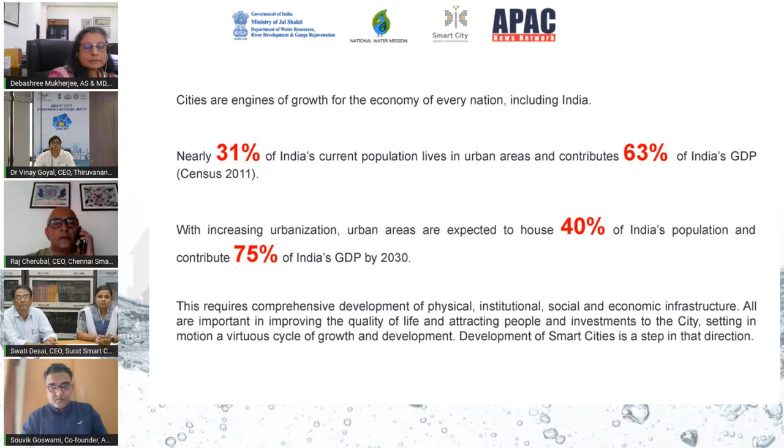Next slide. So this was the concept or the ideology behind coming up with a mission like smart city. The 2011 census shows around 31% of our population lives in urban areas and contributes 63% of GDP. But more importantly, by 2030, this figure will jump to 40% of India's population living in urban areas, and contribution to GDP will be 75%. So this shows where our focus should be, what our priority areas are in the coming years. Next. Smart cities were selected round wise. We have 100 smart cities. Trivandrum was a round 2 smart city, and second in Kerala. Kochi was the first smart city.

You all must be aware, we are the first state and the first district to be hit by the monsoon, which will be arriving very soon. So the challenges which Kerala and per se Trivandrum faces are quite different when we compare it with the northern districts, and especially the water scarce districts like Rajasthan and Gujarat.

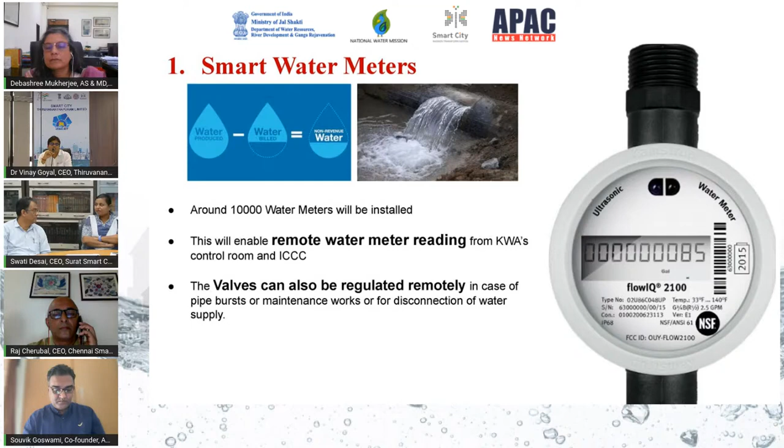And second, we have this remote controlled valve. So in case of a pipe burst, or in case of maintenance work, or if we are not getting timely bills, then these valves can be disconnected also remotely. So as of now, we have started with a pilot project, and around 10,000 smart water meters we will be installing. We are in an advanced stage where we have completed the survey in the ABD area. And as I mentioned, this entire feed will be integrated to our command and control center, where officials from the corporation and water authority department will be taking the finer details from all the inputs.

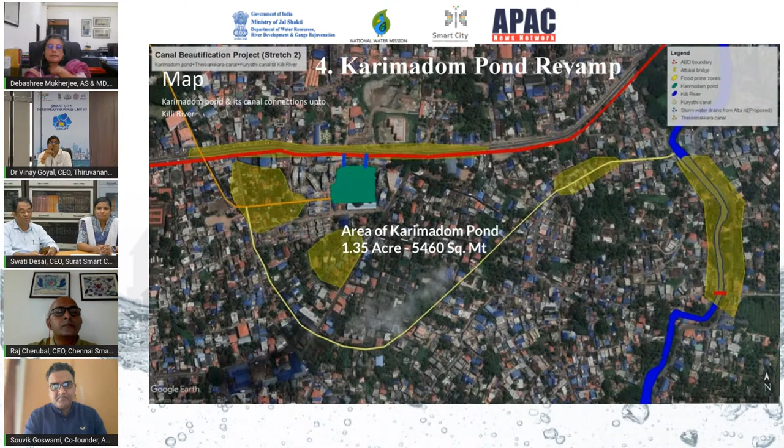Plus, the Karimadom pond was taken strategically. If you can, yes, just move to the previous slide, first slide. Yeah. So along the city drainage system of our canals and rivers, Karimadom acts as a main reservoir for all the incoming water through our dams and rivers, and then it is further connected to the sea, because we have sea on one side and hills on the other side. So proper cleaning of this pond becomes very crucial from a city flood management perspective.

Next. Yeah. So this is the fifth project which Smart City Trivandrum has taken. As I told earlier, we have a high footfall of tourists also. So we have identified 25 critical locations in the city area where we have installed these drinking water kiosks. Although the water coming from Kerala Water Authority is already pure and certified, over here we have purifiers also. Next slide.

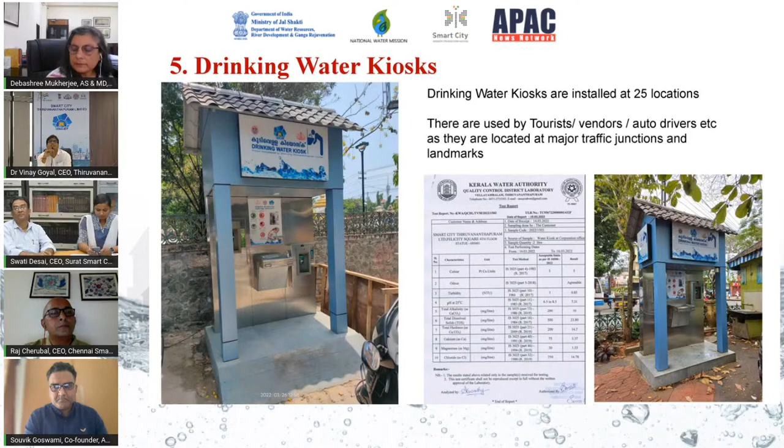Yeah, this is the sixth one, rainwater harvesting structures. So wherever possible on the sites of Smart City Trivandrum, like our multi-level car parkings coming up, a market redevelopment project, a rehab block project, then a warehousing project, wherever Smart City is making some civil structure, we are including this provision of rainwater harvesting structures into our project.

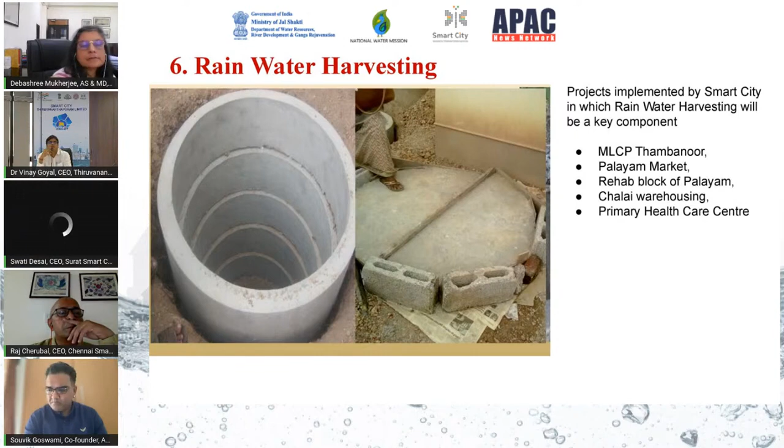Like ma'am was briefing initially, the kind of initiatives which are inculcated into our components will help us in conservation of water. So that is one aspect which we are looking into. Whatever civil structures are coming up, as far as possible, we're trying to include this rainwater harvesting component into them. Next. Yeah.

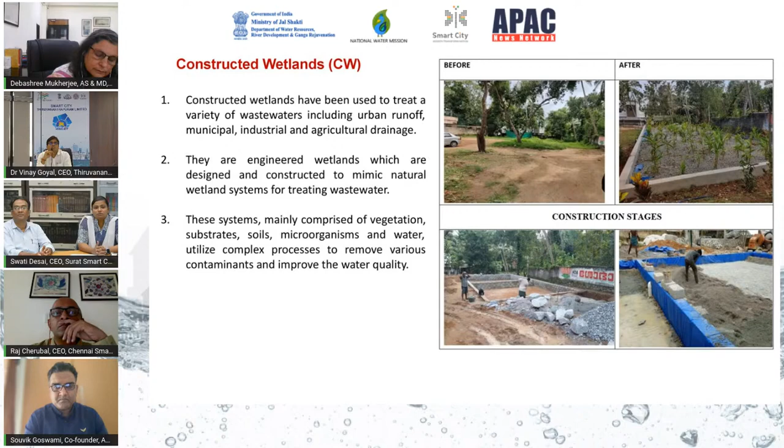So this is one very interesting project which has been done by Trivandrum Municipal Corporation. This is a constructed wetland which has been used to treat a variety of waste waters, like runoffs from grounds, from parks, from the roads, from agriculture waste. It works like a natural wetland. And the purified water can be used for gardening purposes or other purposes. So this is one project which Trivandrum Municipal Corporation is doing. Next.

Yeah, so like I was telling, we have hills on one side and the sea on the other side, and topographically the area is very small. So we have a big runoff also, and two major rivers are flowing directly through the corporation area. So cleaning of all these water bodies and especially canals becomes very important for us, especially from a flood management perspective. So this is the activity being done by Trivandrum Corporation and the Irrigation Department.

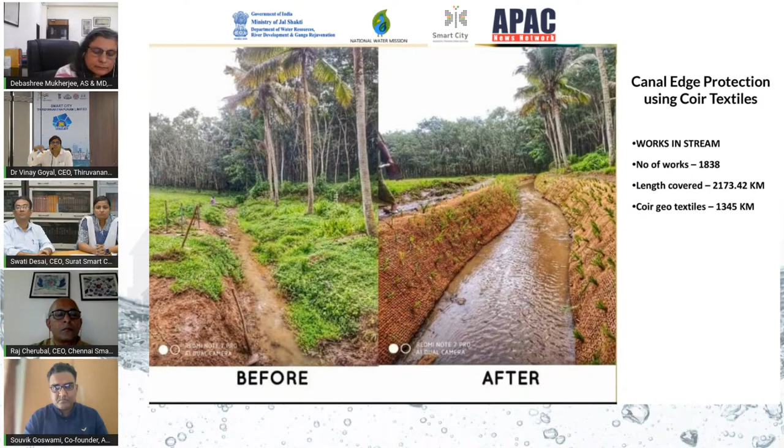So it helps the soil to get stuck and get adjusted there properly. And over the top, there is a bamboo plantation. So it goes very deeply. The roots are very deep so that they can hold the soil and the moisture also. Next slide. So these are some of the pics, photographs from that work site.

Next. Bamboo plantation, again, we know the roots of bamboo go very deep. So wherever possible in our corporation area also, if we're finding some vacant lands in and around the water bodies, we are going for these kinds of initiatives. Next. Yeah, so these are the numbers of wells recharged. 158 wells have been recharged.

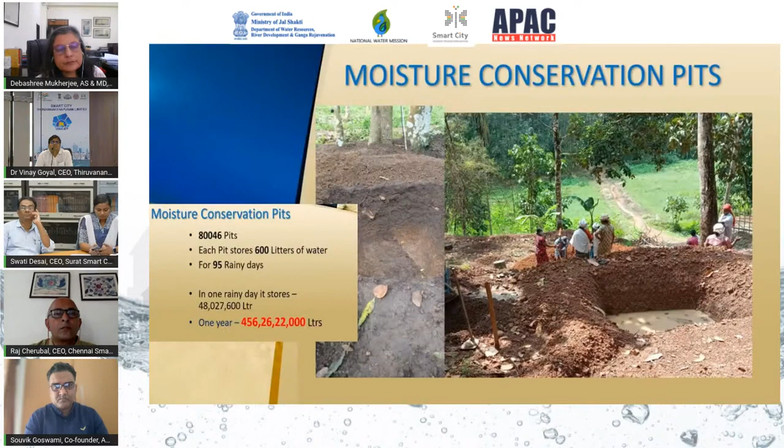Next. These are the ponds, like construction of new ponds, storage, pond renovation also. And very recently, we received a communication from the Government of India as part of the Azadi Ka Amrit Mahotsav celebration. We have been given a target of revamping 75 more ponds. So again, we are working on that front also. Next. Moisture conservation pits also we are working on.

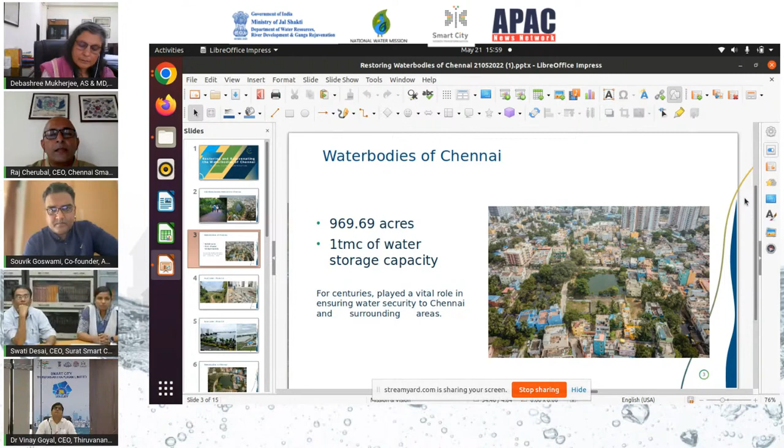Approximately, we just did a rough calculation. So 210 water bodies plus Villivakkam tank, etc., basically means almost 1,000 acres of land. So quite a bit of water has been saved above the ground, and quite a bit of water has been saved under the ground. And from what I understand, around 4 meters or so of water has gone up underground, directly or indirectly related to this water body restoration. Typically, are you able to see the Zone 14 Anai Lake?

Hello? Yes, we are. Please, yeah, go ahead. Okay, yeah, sure. I just wanted to make sure.

So most of the time, the process was about going to these taluk offices and so on and getting the FMB sketch. That was a Herculean task, because figuring out where the water body is, where the damaged and destroyed water body is, was itself a major exercise. And we thank a lot of the NGOs and government officials who helped us with all that.

Then typically what we do is either we get a consultant to do the DPR, detailed project report, or we get an NGO who has done water body restoration to figure out what water body restoration means. We create a detailed project report, and then, depending on where the fund is coming from, we get a contractor or the NGO itself implements.

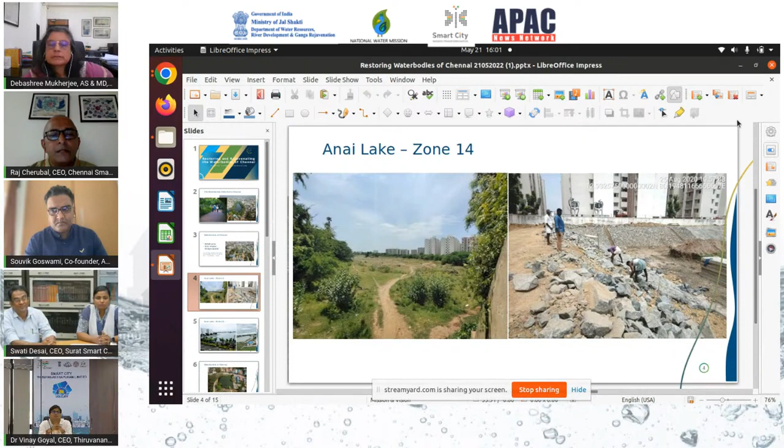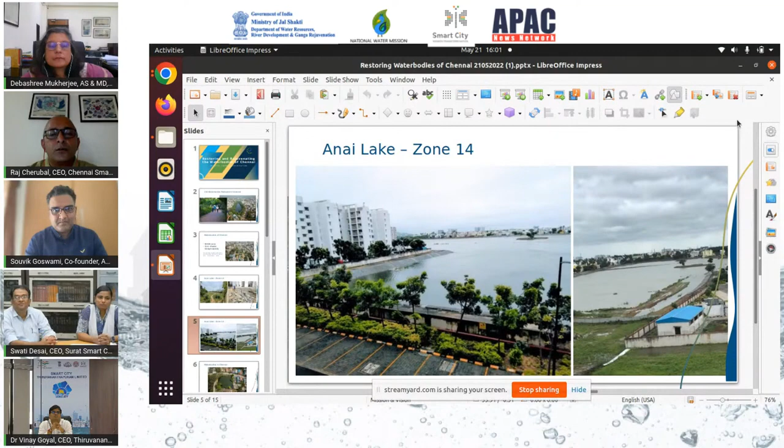So it is the same lake, same water body that I showed you earlier, which was in pretty bad shape. Today it's very, very well appreciated by the public. And you can only imagine how much water is stored in this and how much flood is prevented because of this kind of restoration. These are smaller ones, but as you can see, most of these are surrounded by all kinds of buildings and industry and so on.

So it's obvious why people had difficulty figuring out what exactly is a water body, or where the water body is. So quite a bit of this work has gone on. And just to give you some numbers, 64 water bodies were taken up under CSR funds from CREDAI, Rotary, Lions Club, and so on. About 62 were taken up under Smart City. The rest were taken up under government funding. So quite a bit of help we got from the Tamil Nadu government and various other agencies.

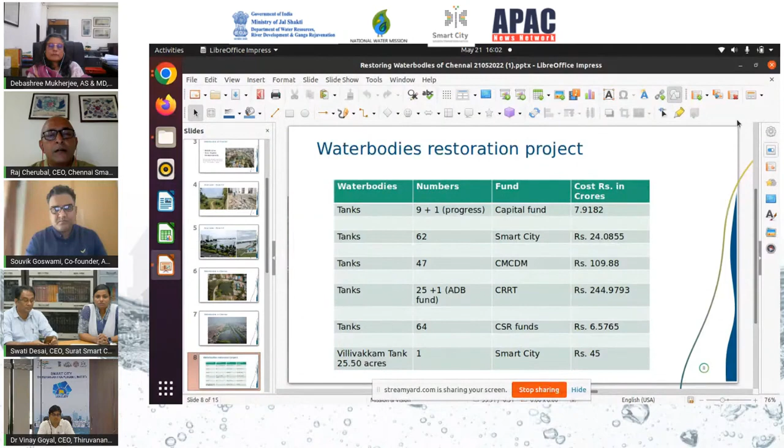And this is one of our very proud achievements. This one, if you had seen it 2 or 3 years ago, was just a sewage dump, because it was used as a sewage dump by the water department, the oxidation pond and so on. And one of the other issues was that there was no connectivity of stormwater drains to this area. So in 2015, this area actually got flooded because not only was this place full of sewage and silt, there was also no stormwater drain connectivity.

So what we have done in the last 2 years is we have completely restored this tank. Villivakkam tank is in the north of Chennai, and this will soon be kind of a little Disneyland for the public over there. So without destroying the water, they can enjoy walking and sports activities and so on.

And very importantly, the various stormwater drains have been connected to this, so that water would flow from one side to the other into the lake during the rain. And when the lake gets filled, the excess water continues to the stormwater drain and towards the sea, which is much further away. This clearly has a positive impact on the area during the rains by preventing waterlogging, flooding, and so on.

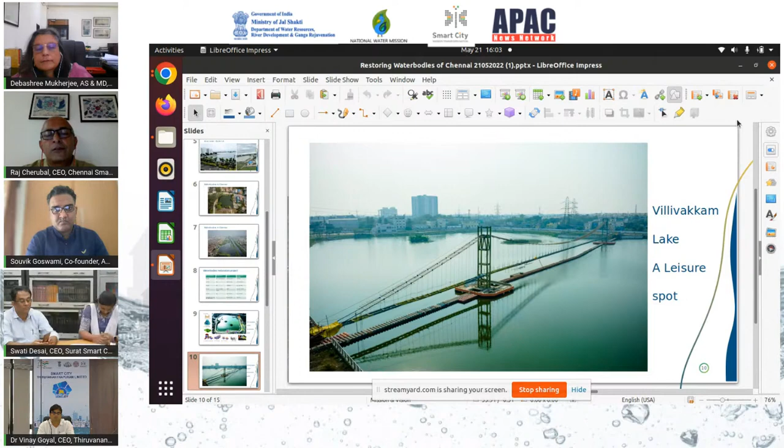We have also created a glass bottom bridge across the lake, so that the public can go there and enjoy, and more importantly keep an eye on the water body, so that future pollution and encroachment can be prevented. This is an aerial view of it. We should be inaugurating this very soon.

Then, very importantly, this is the restoration of water bodies part. Then there is the measurement part. You see, in management they say, if you can't measure, you can't manage. So what Metro Water, which is the water supply department in Chennai, said is that a lot of Chennai is supplied water through tankers, but they had very little idea of how much water is actually inside the tanker.

And as you can imagine what happens to such a system where the tanker fills in more but accounts less, and so on and so forth. So not only was it a waste of taxpayers' money, it was also a wastage of water. So what we did was we funded something like an ATM card. Every driver of the tanker has an ATM card which has a built-in number, let's say 6,000 liters. So he or she has to put the ATM card into this machine, and only that much water is released.

So this way, the Metro Water is able to keep track of how many tankers and how much water each tanker is carrying and where it's going and so on. So much better control of the water supply.

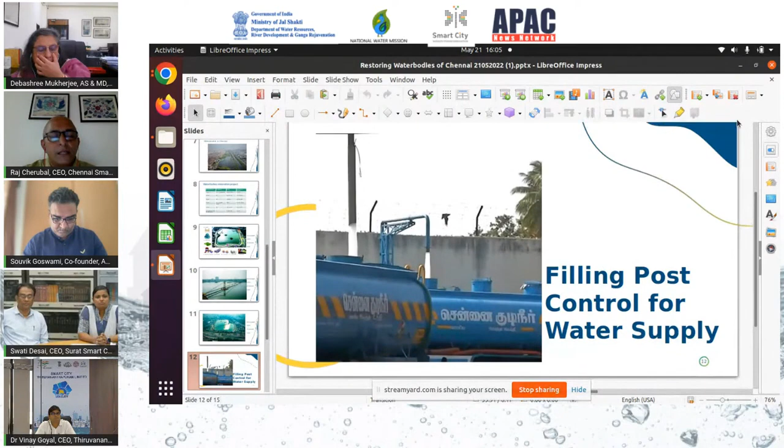Similarly, very importantly, there are two kinds of metering that we have done. One is bulk metering, for commercial and big establishments. There was very little idea of how much a big building is consuming. So if the meter is not working, they would just put an average, even though the water consumption may be much higher. So this is one thing Smart City has funded, and I'm sure it's saved a lot of money and water for the public.

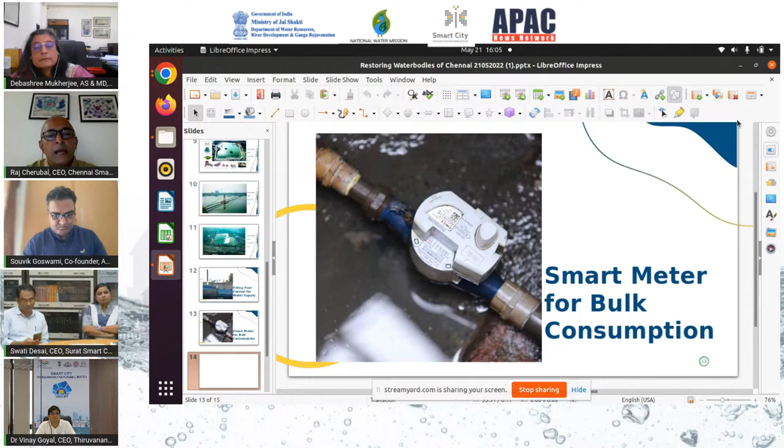And also there is another kind of metering, which is like the zone - entry point into the city, exit, from a DMA kind of setup. I think 200 odd meters we have provided. This also helps them understand the flow of water between the various parts of the city.

So what we realized from some studies earlier on was that for example, T Nagar, which is the ABD area, it's not a question of not having water. It's a question of the west side having plenty of water while the east doesn't have any, within a matter of 2-3 kilometers. The issue wasn't lack of water. The issue is management of water.

So these kinds of smart metering mean you don't need a man or a woman to go check the meter every now and then. It communicates with the central server periodically, telling you how much water flow went through it and so on. So these kinds of mechanisms not only help you measure how much water went in and out, and if there is pilferage and so on, but they also save manpower cost - you don't need people going and checking all the time.

Plus, you can switch the meter on and off remotely. Also, for example, if the meter is not working, you obviously get a message in the server, and you get notified that the meter is not functioning, so you can take action. Compared to a traditional meter which doesn't communicate with the server - if it doesn't work, it doesn't work, and you don't get to collect the fees.

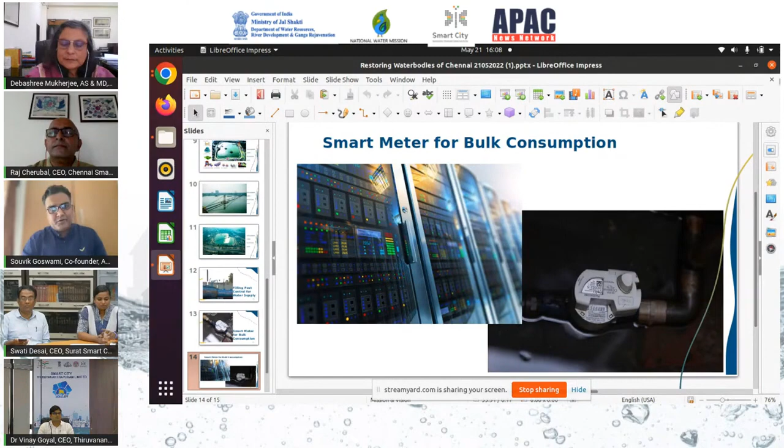I think the last suggestion given by you is very important, where you talked about analyzing data for change in consumer behavior pattern, so that we can conserve more urban water. Thank you so much for your insights.

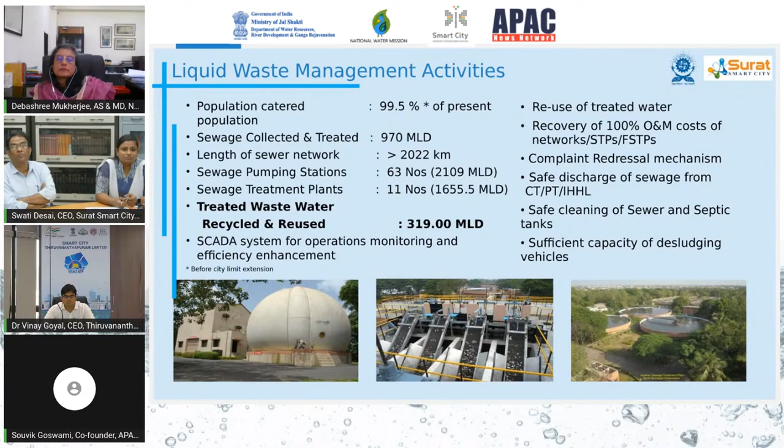We have a digital complaint redressal system for the water and wastewater management system. These are the indicator reports from the last years, showing 100% coverage of these parameters. Coverage of wastewater network service is about 100%. Collection efficiency of the wastewater network has also crossed near 100%. Adequacy of wastewater treatment capacity stands at 134%. These are the parameters we have already achieved in an excellent way.

Next is the concept of recycling and reuse of sewage water through tertiary treatment. Tertiary treatment is one of the success models among our Surat Municipal Corporation and Smart City Mission projects. Surat already has 115 MLD of treatment plants existing in the city for tertiary level treatment. The project concept was initially executed to tertiary-treat secondary sewage to generate industrial grade water, to supply it to Sachin and Pandesara.

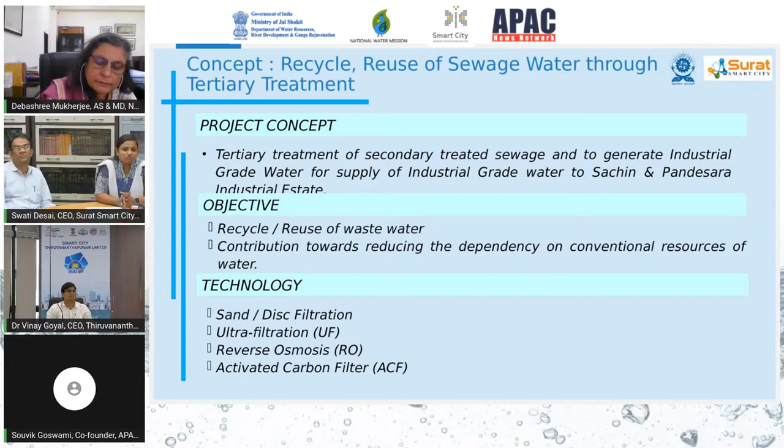The vision is to adopt the tertiary treatment project and promote the reuse of treated wastewater for gardening, industrial reuse, tanker filling, lake restoration, flushing, construction, and agriculture purposes. The vision is also to maximize the collection and treatment of generated sewage and reuse of treated wastewater on a sustainable basis, thereby reducing dependency on fresh water. We are saving our drinkable water to provide to public residential pockets.

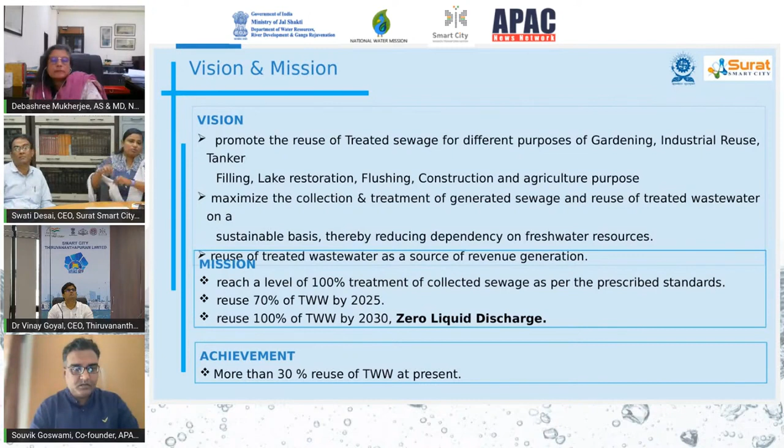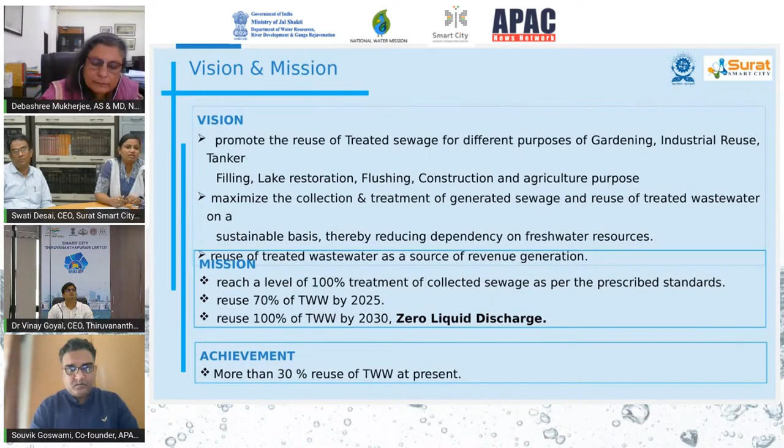The mission also includes revenue generation. We aim to reach 100% treatment of sewerage collection as per prescribed standards, and reuse 70% of treated wastewater by 2025, and 100% of treated wastewater by 2030 - achieving zero liquid discharge by this timeline. Right now, we already have 30% of secondary treated sewerage reused as tertiary treated water.

We are planning to give secondary treated water for construction purposes, as well as for the metro rail project here in Surat. All construction sites are given secondary treated water. We have a biodiversity park covering 87 hectares of land, where we want to provide secondary treated water for watering trench lines in the zones, rejuvenation of lakes, and heavy water bonds. These are the parameters we are providing so far.

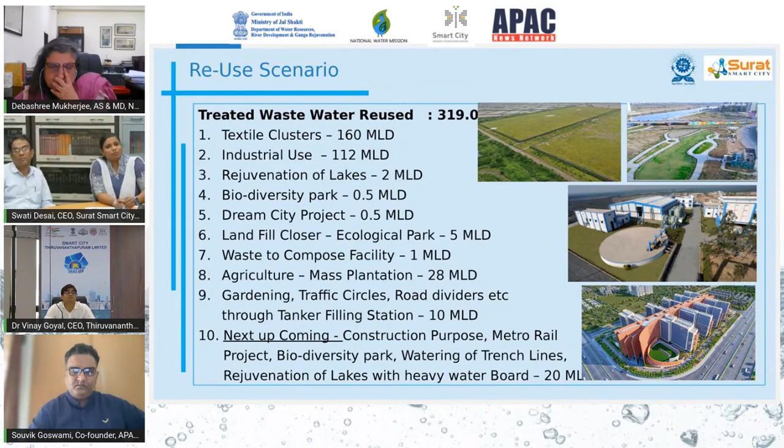This is a success story Surat has already achieved. Surat, being a textile city, has more than 450 dyeing and printing houses. Pandesara Industrial Area is a major textile cluster with more than 125 dyeing and printing houses - they are the bulk water users right now. Pandesara Industrial Estate was merged with municipal limits in 1986, and SMC started supplying potable water for industrial purposes since 1998, to meet the increased water demand of industries and reduce the burden on water resources primarily required for domestic purposes.

SMC initiated the idea to opt for using treated wastewater to satisfy industrial demand. With the support of user industries and the state government, SMC built a 40 MLD tertiary reliable wastewater treatment plant, which is a successful model operational since 2014.

After the success of the first larger operational tertiary treatment plant for the Pandesara industrial pocket, additional demand was raised for TTP water as process water for industries, and hence an additional 40 MLD TTP was undertaken by the Smart City Mission at Dindoli. Looking to assure quality and quantity of TTP water, industrial setups adjoining the city also came forward to get their wastewater for their own industrial purposes, so we also got a 35 MLD treated TTP plant at Bamroli.

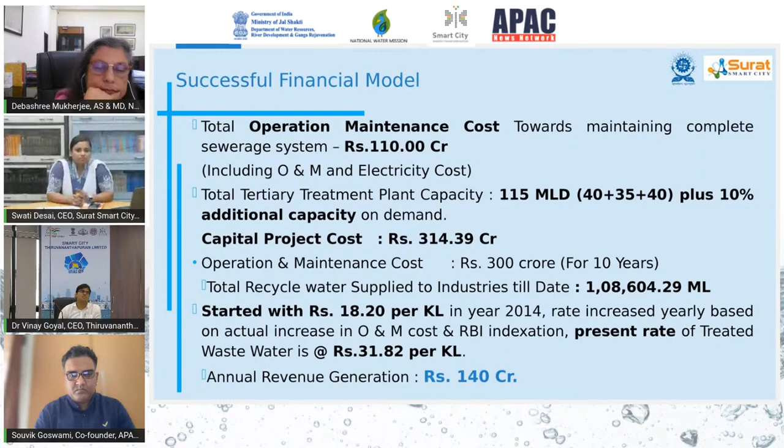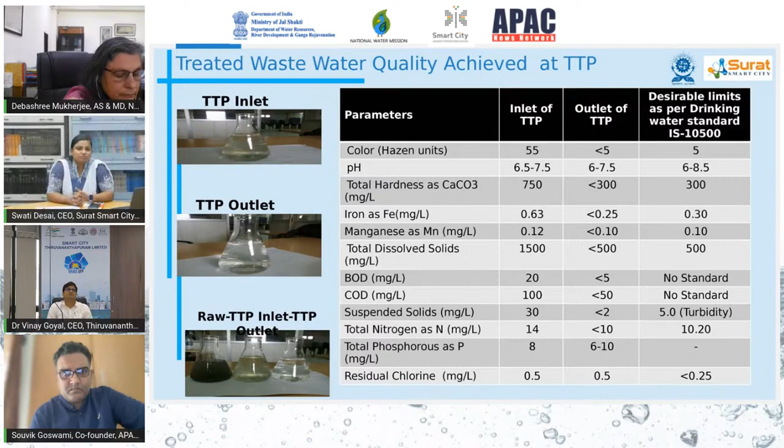These are the parameters for the tertiary treatment plant, the water quality achieved for the tertiary treatment. These are the parameters of the IS 10500 standards we already follow, a kind of drinkable water that one can use for industrial purposes itself. Next. So these are the success stories right now for our project.

The way forward for the future is considering the amount of sewage that is currently treated, and the recent policy of the Government of Gujarat that within around 50 kilometers of the city limit, treated water has to be used, not potable drinking water, for their industrial area. On this policy, Surat Municipal Corporation proposed to replicate this project to supply industrial grade wastewater to the industries located near the city.

Now on the demand of the surrounding city area, there are many pockets like SR, Hazira, and many industrial pockets. Those demands are here for reuse of non-potable water. The plan is to treat wastewater for industrial use and for non-potable water itself. Based on the location of industries in and around Surat city, and the location of various sewerage plants in the city, the complete area has been zoned into three main clusters, that is Bhesan cluster, Dindoli cluster, and Karanj cluster. The demand details have been collected from the industries and accordingly the detailed project report and proposal has been submitted to the Government of Gujarat.

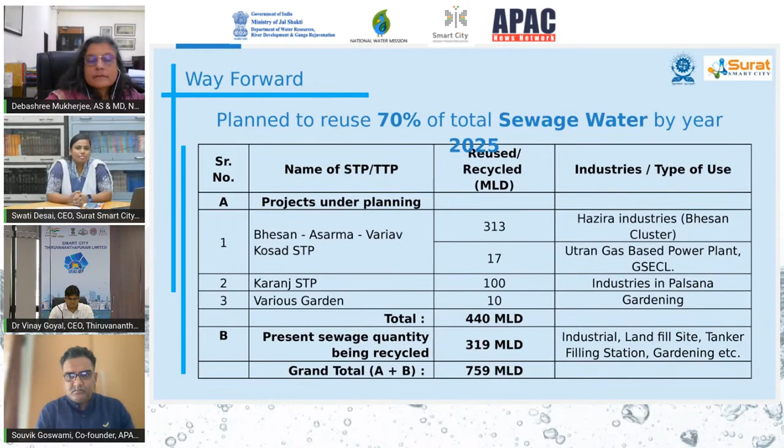Next. So these are the success stories for Surat in using wastewater for revenue generation, and balancing the industrial needs as well as the residential needs. Thank you.

Thank you so much, Swati Desai, CEO of the Surat Smart City, for sharing with us insights on the work being done in Surat in terms of treating wastewater and reusing it for various purposes. Quite a commendable job, I must say. Over to you, Debashree Mukherjee ma'am, for your thoughts on this presentation.

Thank you so much, Swati. That's a very inspiring presentation. Just a quick question from the numbers that you talked about.

So in terms of the contracts that are already in place, it seemed like you break even in 5 to 6 years, including the capital investment as well as your O&M costs. Yes. Ma'am, actually, on the capacity of 319 MLD, we have already recovered our capital cost as well as O&M cost. Now we are sustainable and get revenue income for the municipal corporation from the project itself.

For the upcoming project, we have submitted the DPR to the government, and on that basis, capital infrastructure will be provided by the SMC. On the basis of that, we are able to generate revenue for that particular project also. So is it not possible to do this in PPP mode, given that there's an assured revenue stream there? We can also, ma'am, think on that particular segment. But right now, with the success story of what we have achieved so far, we are in that particular action plan. This can also be projected in PPP mode. Right, right. Interesting.